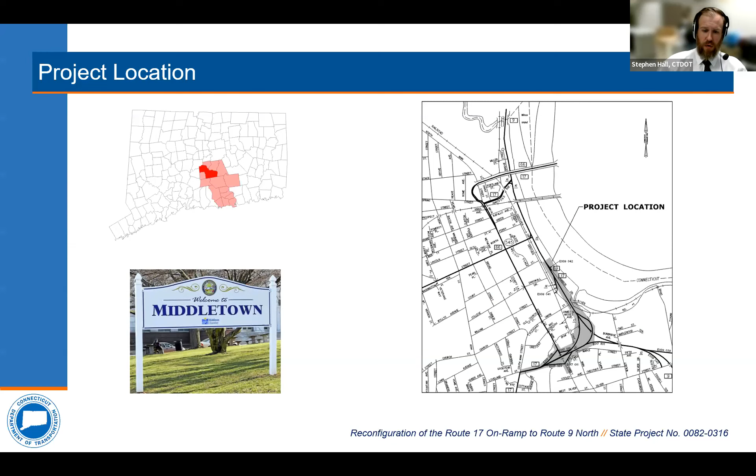This project is located in the city of Middletown in Middlesex County. On the right side here, with north facing up, we have the Connecticut River on the east side, Route 9 North, and the Arrigoni Bridge over the Connecticut River.

Now we have a few projects in the area, and you'll notice I've rotated the orientation, so now north is to the right and the Connecticut River is on the bottom. Since about 2014, we've been developing projects in this area, so I wanted to pause and make sure we all understand the different projects going on. We have Route 9 North from left to right on this page, and Route 17 northbound that overlaps Route 9 and goes up and over the Arrigoni Bridge.

One of the first projects we did back in 2019 was 82319. This project constructed sidewalk bump outs on Main Street with the goal to improve pedestrian safety, shorten crossing distances, and give that extra green time saved back to the cars on Main Street to encourage them to use Main Street instead of the side streets to cut through. This project was completed in about 2019.

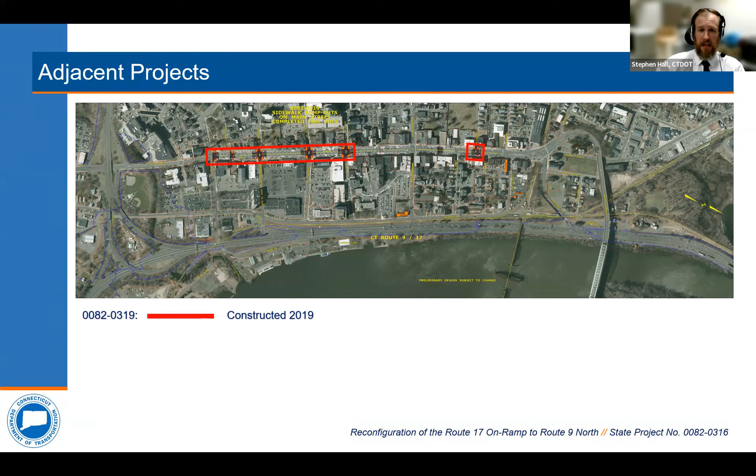The next project we did was 82320, completed in 2020. The purpose of this project was safety and congestion reduction, again trying to make operations on Main Street better to encourage vehicles to use Main Street and not cut through Spring Street, past McDonough School, Grand Rapallo, and things of that nature.

We fixed a dangerous signal configuration at Rapallo and Grand, where both legs had a green light, so we've been able to increase safety there.

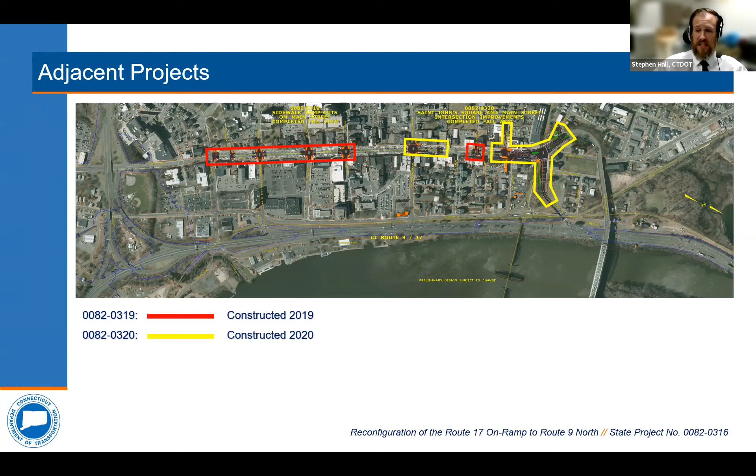We've also fixed a lot of the parking in the north end. There were very small parking stalls before, and we had a lot of sideswipe crashes with cars parking there. We were able to improve the size of those parking stalls and bring that back up to standard.

The next project, not yet constructed but designed, is 82-322. This project came about as a result of the 2018 public informational meeting regarding the larger signal removal project. The purpose of this project is to close off the Miller Street access to Route 9. Right now, that's the only access into or out of that neighborhood because of an at-grade railroad crossing that's closed. So 82-322 will open up that railroad crossing and close off the Miller Street access to Route 9, allowing that neighborhood normal, safe access through downtown as opposed to entering onto Route 9.

So again, this project is designed. The design is completed. However, there's a rather long railroad procurement process, so construction will begin in spring of 2024 for this project.

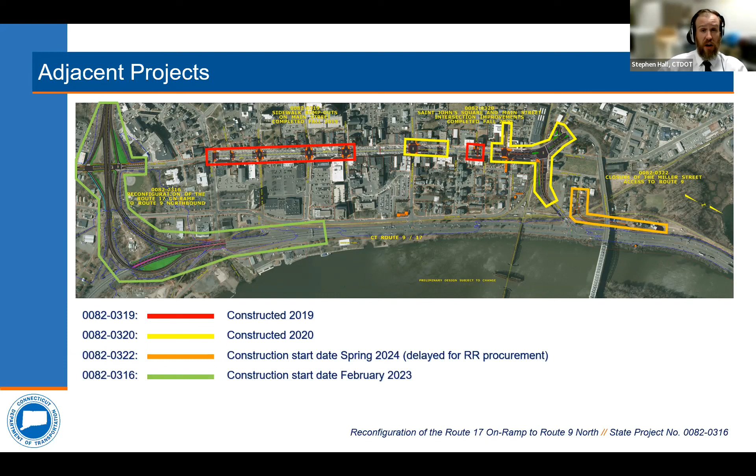The next project is the subject of today's meeting. That's 82-316, a safety project to reconfigure the Route 17 on-ramp to Route 9 northbound. We're going to get into significant detail on this project in the coming slides.

Lastly, we have project 82-318, which is a signal removal project. This is the large project that we've shown to the public a number of times. It proposes to remove the traffic signals on Route 9. This project is still in design. So in the past couple of years, we have been doing a traffic analysis and we're preparing to go back to the public in the winter of 2022, early 2023.

Just to reiterate, the reason I'm showing these all separately is that these all have independent utility. So when we evaluate these projects, we ensure that, and the federal highway ensures that, we are actually fixing a problem, and this project stands alone on its own. This project doesn't need other projects to be a good project, so to speak. There's a purpose and need for each of these that we have accomplished.

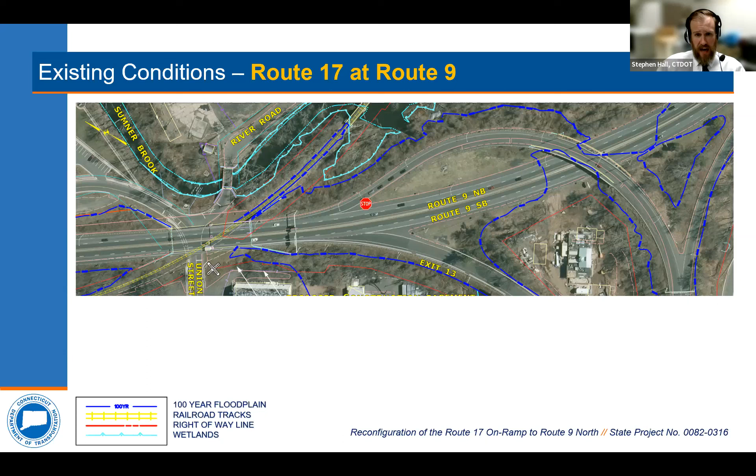So again, Route 17 up and over Route 9 to the stop controlled interchange. What we have at this location is obviously a stop sign. Vehicles have to look over their left shoulder at a very acute angle, and they need to try and identify a gap in traffic when cars are traveling 55 miles per hour. So a vehicle in this position needs to find that gap far over their shoulder and quickly accelerate to avoid getting into a collision.

As we move further north, the width of Route 9 is constrained by Bridge 638, which carries Route 9 over Union Street and the Providence and Worcester Railroad. As you take a look below Route 9, we see this is Union Street here, with the railroad crossing. Currently, we only have one pedestrian crossing, and that's on the north side of Union Street. There is a rutted out path, however, there's no safe pedestrian access across the tracks here. And this really is the gateway to the riverfront of Middletown.

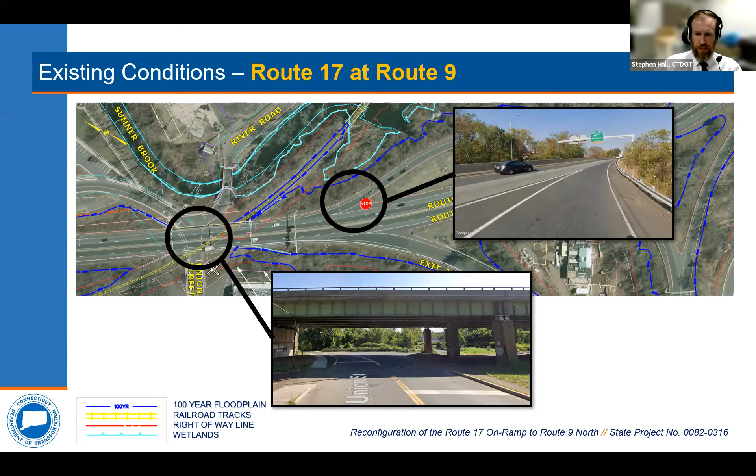Moving a little bit further north, we're going to look at Harbor Drive. Harbor Drive is a low-speed local access road to the riverfront that also serves Route 9.

If we take a look at Harbor Drive a little further back, you see the old canoe club. If you were a local in the area, you wouldn't think this was an on-ramp to a freeway. However, as we move further up Route 9, you see the interchange with Harbor Drive and Route 9. There is no stop control at this location, and there's really not much of an acceleration lane. So a lot of vehicles take this option onto Route 9 to avoid the previous stop-controlled interchange between Route 17 and Route 9. However, it's really not a safer option.

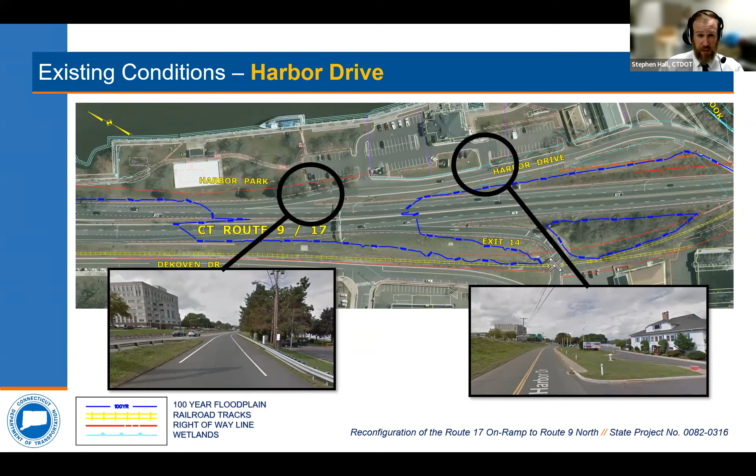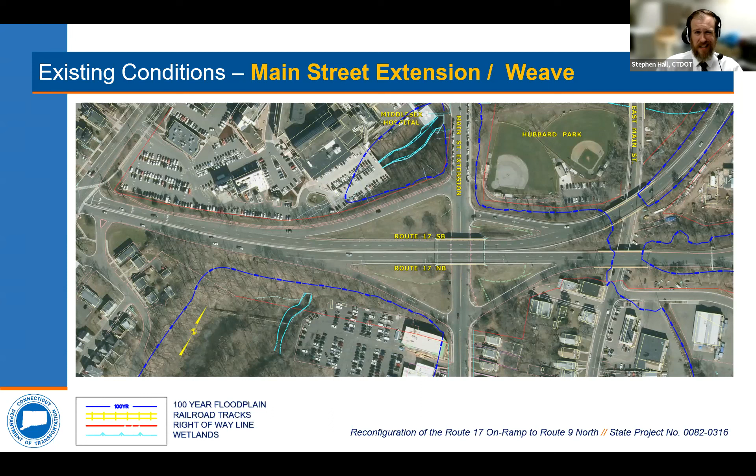Taking a look at this location, merging up from Main Street Extension onto Route 17, we have a weave condition. What that basically means is we have 2 lanes of traffic with a third entering here that splits off into Route 9 North and Route 9 South. We have driver uncertainty where one driver is trying to cross left while one's trying to cross right. It's not an ideal scenario.

Also on Main Street Extension, we have a very wide pavement structure. We've got on-street parking on one side and pedestrian access only on one side. You see there are actually pedestrians walking here, possibly to the hospital where they might work, with no pedestrian facilities.

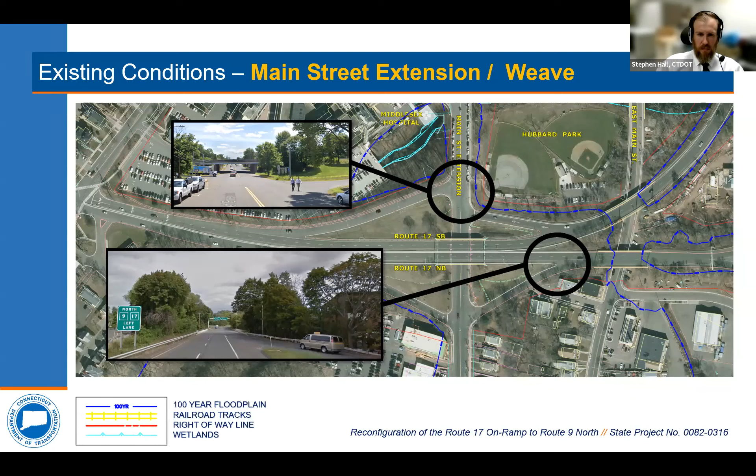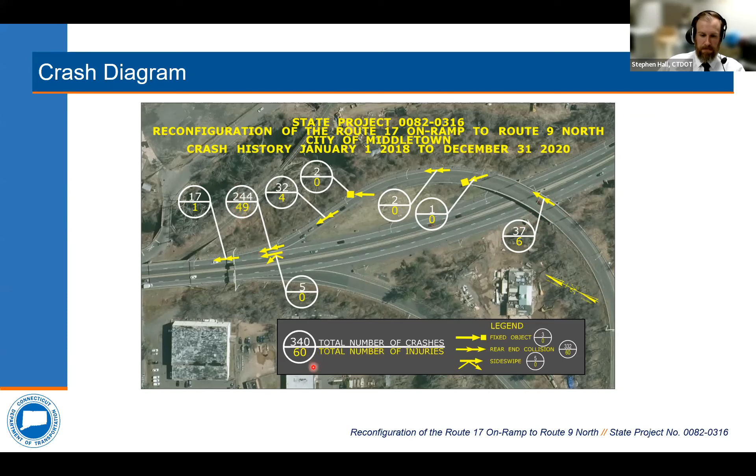So the purpose and need of this project is safety. The purpose of this project is to reduce rear end crashes at the Route 9 and Route 17 interchange. The project is needed because the existing stop controlled on-ramp from Route 17 onto Route 9 has a crash rate significantly higher than similar adjacent segments of freeway.

Essentially, we identified this location, how many crashes we would expect, and how many crashes we experience. So when there's a large discrepancy, that raises a red flag that allows us to investigate further and find solutions.

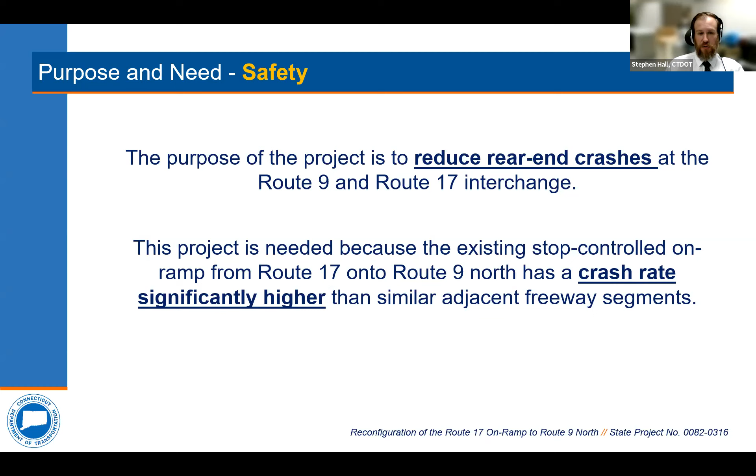So now to some project history. This project's been around for a little bit, as I mentioned before. September of 2014 was the first time this project was shown to the public. We had a public informational meeting, workshop style, with about 40 attendees. Generally well received, really no negative comments.

Fast forward a couple more years, 2016. In that time, we further developed the project, but we also brought out 82318, which is that signal removal project. So in 2016, we showed 2 separate projects, 82316 and 82318. Most of the comments revolved around the larger signal removal project. However, again, we really had no negative feedback on 82316, the Route 17 to Route 9 interchange.

From 2017 to 2019, we spent that time developing adjacent projects downtown that I alluded to earlier. We built 82319, which is the bump outs on Main Street. We constructed 82320, the St. John's Square improvements. I mentioned 82322, which is the Miller Street access that's going to be going out to construction shortly, and then 82316, which we've been developing over this time.

In January of 2021, we began monthly progress meetings with the city. We felt this was the best way to ensure that the city's plans for the downtown area really align with what we were designing early in the process to avoid needing to go back and do much redesign. So those were monthly meetings where we discussed the city's goals, our goals, and made sure we were aligned.

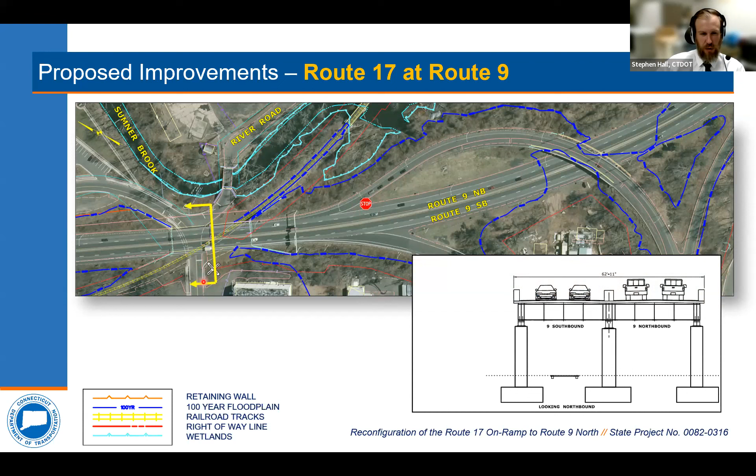Looking northbound in the existing condition, we have this yellow section break corresponding to this cross section. Route 9 northbound on the right side, southbound coming into the page on the left side. This is our existing configuration of Bridge 638, 2 lanes northbound, 2 lanes southbound. This constraint is what prevents us from adding that additional lane to provide appropriate acceleration for these vehicles.

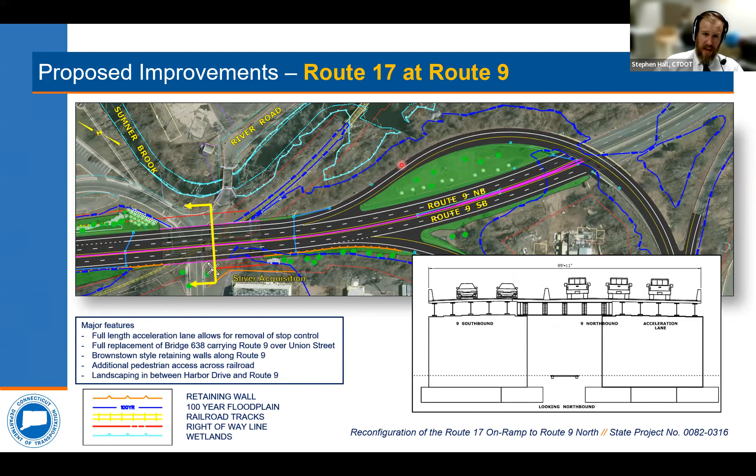So what we plan on doing is completely reconstructing Bridge 638, since that bridge is too narrow for us to fit that extra lane. We're going to replace the bridge in total. I want you to focus on the east edge of road, we're keeping that where it is. All the widening will occur on the west edge of road. So no work east of Route 9, and we're not doing any more work on River Road. There's no need to acquire any property in that area. This allows us to construct a full length acceleration lane on Route 9.

You'll see in the cross section here, same location, looking northbound through the bridge. We'll now have 3 lanes northbound, with the far right being the acceleration lane, plus 2 northbound lanes, and of course 2 southbound lanes. Some of the major features: the full length acceleration lane eliminates the need for that stop control configuration, and there's going to be a full replacement of Bridge 638 carrying Route 9 over Union Street.

We have retaining walls on the west side of Route 9, and as part of our coordination with the city and with Cooper Robertson, we're going to go with a brownstone style aesthetic treatment to try and match St. John's Church. Obviously, brownstone is a very big, important part of the area.

We're going to be adding additional pedestrian access across Union Street as well. If you recall, the only pedestrian access right now is on the north side, a rutted out path with no safe means to cross. So we're going to provide 2 ADA compliant safe pedestrian passages across the railroad crossing. Again, this is the gateway to downtown, and there are lots of plans to develop the riverfront. Now is the time to put that additional pedestrian crossing in.

And lastly, in the area, we have some great landscaping planned. Our landscape design unit was chomping at the bit to do some designs in this area to really help integrate our design with the riverfront development. We're very excited to see that design go in.

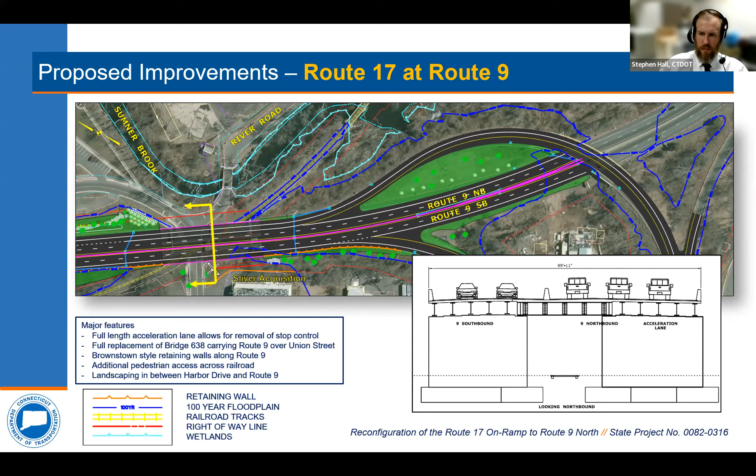I will mention there is a proposed sliver acquisition of the personal auto care property. We met with the property owner; it is a land-only acquisition. Basically, we need that space off our retaining wall to make sure we can properly maintain it. We've confirmed with him that this won't affect his operations on a day-to-day basis.

Moving a little bit further north, we're looking at the Harbor Drive area, oriented the same way, about 10 o'clock. We have Route 9 north running right to left, Route 9 south left to right, and Harbor Drive at the top of the screen. Harbor Drive really wants to be a low-speed roadway that services Harbor Park and the riverfront, not an on-ramp to a freeway.

So when we construct our full-length acceleration lane from Route 17 to Route 9, we have to lengthen it enough to ensure that vehicles entering Route 9 are at about the same running speed as the vehicles on Route 9. That low speed differential helps dramatically improve safety and reduce the severity of crashes. But because of that lengthening, the proximity becomes too close to Harbor Drive, creating a very unsafe condition for drivers. Additionally, given the riverfront development at Harbor Park, we felt it was contextually sensitive to close off the access to Harbor Drive.

Again, you see some more of that landscaping here, really trying to tie in our facilities with the riverfront area.

When we close off Harbor Drive, as I alluded to before, we're going to be redistributing a decent number of vehicles. Of all the vehicles that want to get to Route 9 North, half are going on Harbor Drive and half are taking Route 17. There's a tremendous amount of vehicles avoiding the stop-controlled on-ramp we're trying to fix, opting for Harbor Drive, which really is not a safer configuration.

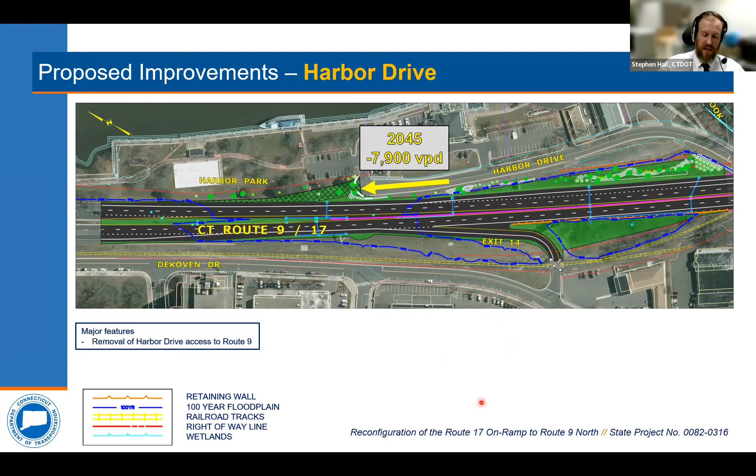Since we are redistributing all those vehicles, we need to accommodate them to get back onto Route 17 and Route 9. That's the impetus for the work at Main Street Extension. So those 7,900 vehicles will now be using this location to access Route 17, Route 9.

So again, a quick orientation here. We have that offset diamond configuration. It does not do well for traffic operations, and that's because of Hubbard Park's proximity to the freeway.

Our proposed scope of work is to first realign the Route 17 southbound on-ramp from Main Street Extension. We can't move the southbound off-ramp due to Hubbard Park. By realigning the southbound on-ramp, we can now signalize this intersection, modify the lane configuration, and more than adequately handle the 7,900 vehicles we're removing from Harbor Drive to pull them through Main Street Extension.

Additionally, we have this weave scenario here that I was discussing. We analyzed this with a few different traffic analysis softwares, and determined that the volumes were low enough that we can actually just hold one lane coming across Route 17 here and simplify the weave to 2 lanes. So as opposed to 3 lanes, very poorly striped, we're going to have 2 lanes, simplify the operations, and hopefully improve safety throughout the weave.

We're also adding additional pedestrian access on Main Street Extension. Right now, the only access is on the east side of the road. We're adding a whole additional sidewalk on the west side. Given the traffic generators with the hospital, and the pedestrians we see out there, we felt it was appropriate to add that pedestrian connectivity throughout the corridor here.

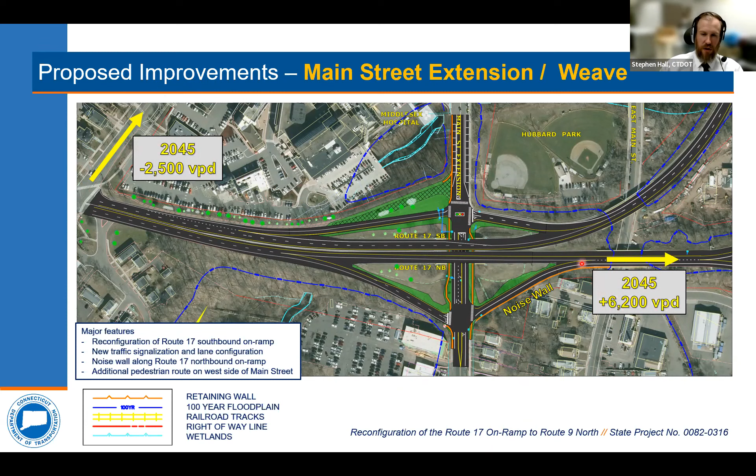As I alluded to before, of the redistributed 7,900 vehicles, 6,200 of those are going to be coming through here, and we're actually going to drop another 2,500 more in that area. So a tremendous reduction. We're going to get these vehicles where we would rather have them go, which is Route 17 to Route 9, not Union Street to Harbor Drive to get onto Route 9.

So let's summarize. What are the benefits of this project? First and foremost, improve safety. The removal of stop control and the extension of the acceleration lane allows us to dramatically reduce the number of rear-end crashes that we see. We see a clear pattern of rear-end crashes in the area. We can attribute that to the stop sign, and we have a solution to remove that stop sign and remove that unsafe condition. The lower speed differential will be a tremendous help not necessarily in the number of crashes, but the severity of crashes as well.

Talking about reducing the injuries that we see out there, a smaller speed differential will certainly help. We're going to remove about 7,000 vehicles per day on Harbor Drive.

This directly aligns with the city's Return to the Riverbend initiative. Eli Cannon's and Nora have been setting up shop down there, trying to build out a whole area down the riverfront. That's not a spot for a freeway on-ramp, that's a spot for a low-speed urban road. The city seems to agree with that, and that's something we got out of the press conference back in February.

We're also going to improve pedestrian connectivity along Union Street and Main Street. We found two locations with ability to add additional pedestrian crossings: Union Street across the railroad, and the Main Street extension heading on the west side of the road.

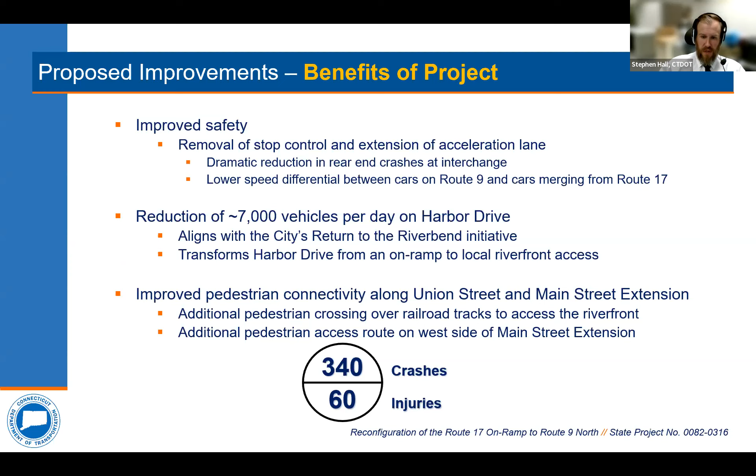At this point, I'm going to turn it over to Matt Giannakopoulos, who is part of our division of rights of way, to discuss the process for property acquisition. Thanks, Steve. I'm Matt Giannakopoulos, a project coordinator with the department's division of rights of way. It's our office's responsibility to acquire the property rights needed for transportation projects.

As Steve alluded to earlier in the presentation, the proposed design does require an acquisition of a small portion of property to allow for the reconstruction of the Union Street Bridge. I'm here tonight to give a brief overview of our right-of-way acquisition process.

All property rights will be acquired in accordance with Connecticut General Statutes sections 13A-73 and 13A-98E. And whenever federal money is used in any phase of a project, such as this one, the department must adhere to what is known as the Uniform Act.

At this point, the affected property owners have been sent a letter of intent to acquire from our office, and it depicts the exact rights to be acquired. We're in the process of obtaining an appraisal to determine the fair market value of those rights, and we'll use that value to establish an offer of just compensation.

That offer is then sent out to the owner in writing, and a right-of-way agent from our office is available to meet with the owner to explain the project in more detail, the impacts to the property, and how the state came up with its offer.

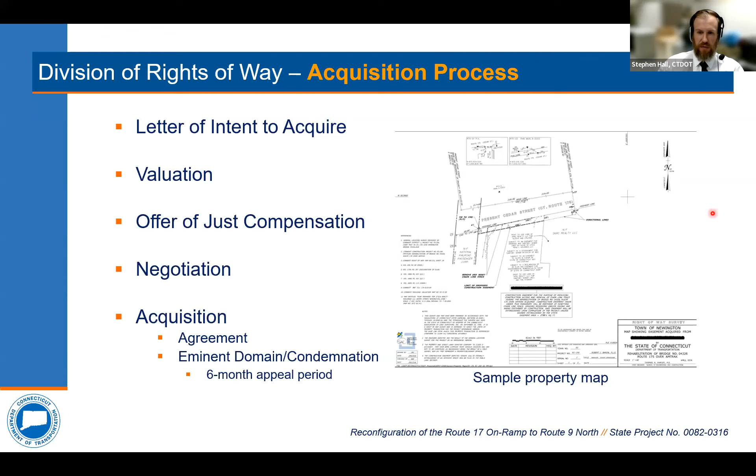Okay, so now I'd like to get into the construction staging. We've shown the proposed improvements. Now we want to show how we're going to actually go about building this. There's going to be 10 stages, so try and bear with me here, but I'll try and keep this simplified.

The first thing we're going to do is the Main Street extension, and this is going to begin spring, summer 2023 and last about 3 months. The major work in this stage is going to be to relocate the Route 17 southbound on-ramp from Main Street extension. This may require a detour via Pleasant and South Main, but that would be a very short duration.

One of the reasons why we're doing this work first is because if you think about the redistributions from the Route 17 on-ramp, we're going to send a lot of vehicles to Main Street Extension once that on-ramp's operational. So we need to make sure this location is operational prior to redistributing all those vehicles from Route 17. So we have it staged this way.

We have stipulations in the contract that force the contractor to build it in this order. However, I will mention that this is a suggested construction contract sequence. We will receive submissions from the contractor that the department will have to review and approve to ensure we're not causing undue stress to parades downtown, riverfront development, things of that nature.

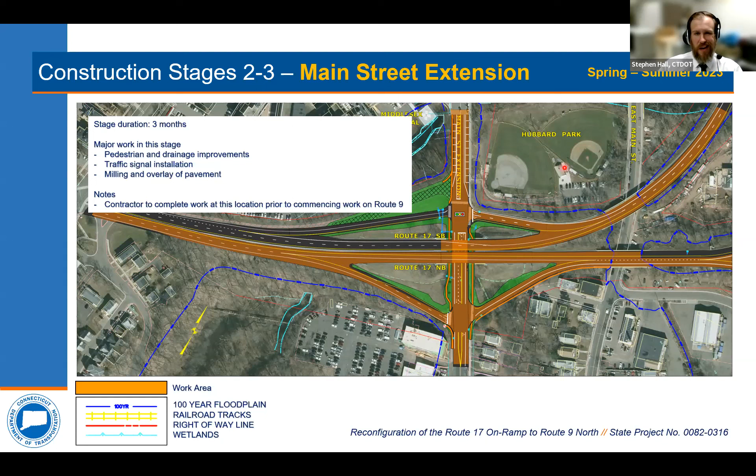The next thing we're going to do is the pedestrian improvements and the drainage improvements off the edge of the road. This is still spring, summer 2023, about 3 more months of work, kind of offline, doing the sidewalks, the drainage. We have to install the traffic signal.

And then from that point, we're going to mill and overlay the pavement. So the orange you see here will be where the pavement is removed. There may be some bridge work that will rear its ugly head once we pull that pavement off that may cause some problems, but we're not expecting something along those lines. And then we're going to put back new pavement.

So when we move on to Route 17 and Route 9, the location you're looking at here is going to have fresh pavement markings. It's not going to feel like you're driving through a construction site.

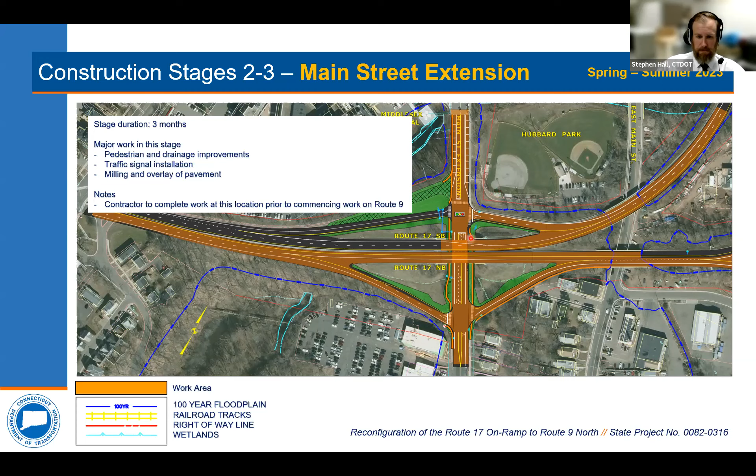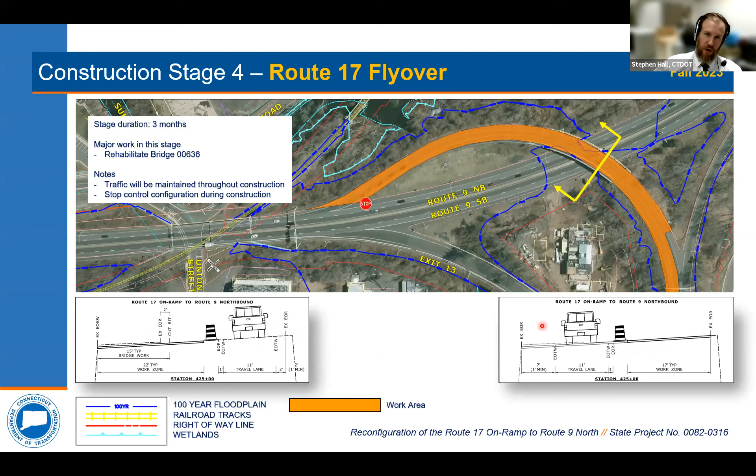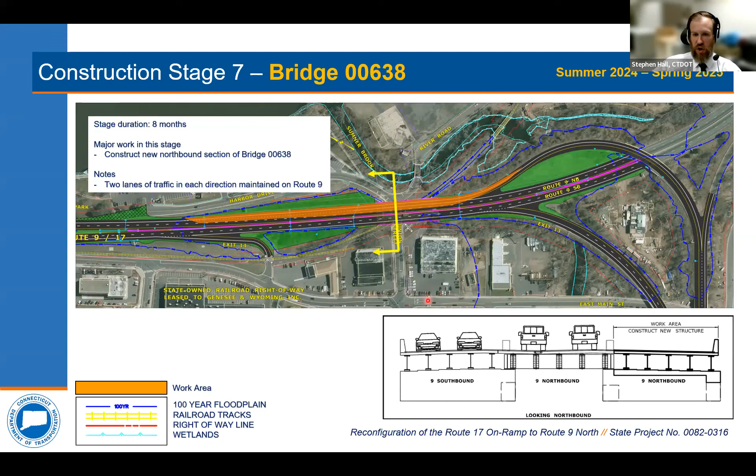Look at stage 7, the last of our major bridge stages. At this point we've constructed the westernmost and central portion of the bridge. Now we're going to look at the easternmost portion of the structure. Here we're running Route 9 southbound traffic on that relatively new structure. We've got the center structure up and running, and now all the way to the east we're going to construct the east side. Major work here is to construct the northbound section of Bridge 638, maintaining 2 lanes of traffic in each direction. We're looking at summer of 24 to spring of 2025. Each of these bridge stages is rather robust, and they take a good amount of time.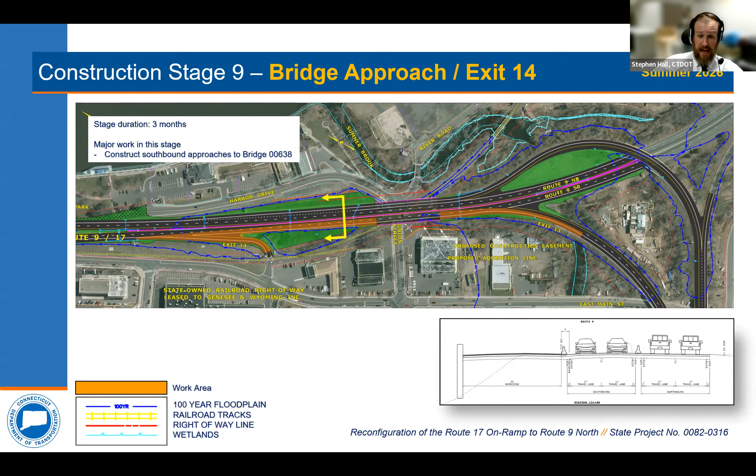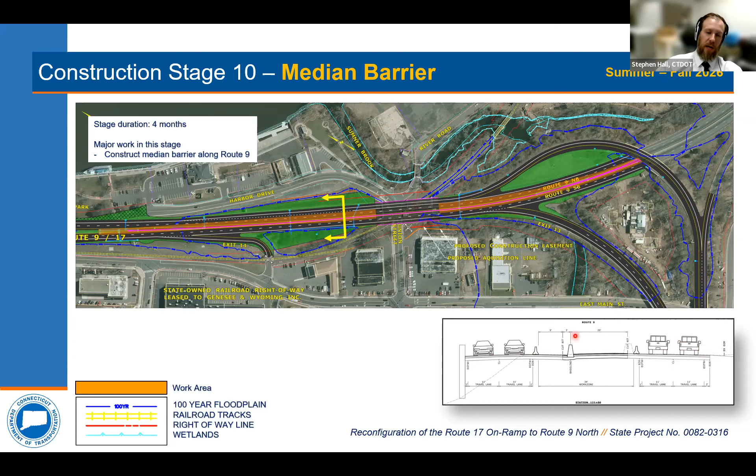Moving on to stage 9, very similar - this is going to be the approach work and some wrap-up work on the southbound lane, getting everything back up to grade. There is a rather large elevation change at a couple of spots, so we have to step up the elevations a little bit. Then our last stage, stage 10 - the last thing we have to do is the median barrier. We'll have traffic running all the way to the east and all the way to the west, and we're going to have a work area down the center to construct that single slope median barrier, improving safety there tremendously.

So to recap, this is our final condition, focusing on the ramp configuration. This is our permanent condition. We have our Route 17 flyover. We have not widened anything over to the east, no impacts to the east aside from that landscaping. We've widened the structure over to the west, so we've now provided an acceleration lane, a free-flow acceleration lane without having to stop for vehicles coming over Route 17, all the way up to Route 9 North to gradually merge into traffic. We're maintaining those 2 lanes northbound and 2 lanes southbound.

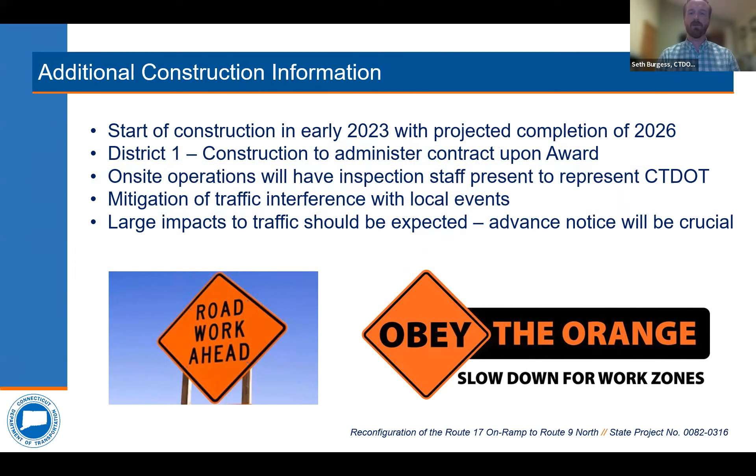Good evening, and thank you, Steve. My name is Seth Burgess, supervising engineer from District 1 Construction, and I am joined by Mr. David Gentile, who will be the project engineer overseeing this project. As previously mentioned, we're anticipating the start of construction in early 2023, with anticipated project completion at the end of the 2026 season. District 1 Construction will take over as the lead point of contact in regard to administration of this project following the award of the contract. All on-site contractor operations will have inspection staff present to verify compliance with appropriate contract specifications.

We anticipate large impacts to the traveling public, which will require constant oversight, communication, and coordination regarding the maintenance and protection of traffic staging that's going to be implemented, as Steve has detailed in the past couple slides. Though these impacts may be large in relation to normal commutes of the public through this area, construction will be temporary over a few-year duration and provide a much safer and efficient flow of traffic for years to come.

Connecticut DOT representatives will work to coordinate with the City of Middletown to mitigate any traffic interference with large city events. We also request continuous assistance and understanding from all stakeholders regarding impacts to existing roadways during construction, in hopes of increasing work zone safety for all, including the public, the contractor, and Connecticut DOT representatives. Concerns will be addressed in a timely manner to keep all in the area safe and keep the construction project moving forward. Thank you, Steve, for the opportunity, and we look forward to enhancing the infrastructure through this area. So with that, I'll kick it back to you, Steve.

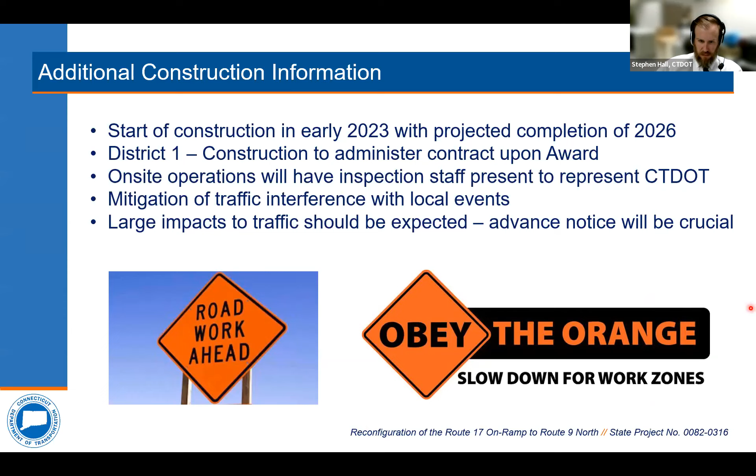Okay, so project schedule and cost. We're going to advertise this project October 27th, with bids opening to contractors on November 30th. We expect to award the project January 27th, with a construction start date of March 13th. As Seth mentioned, we expect to complete this project by the fall of 2026, and it's a construction cost of about $54 million.

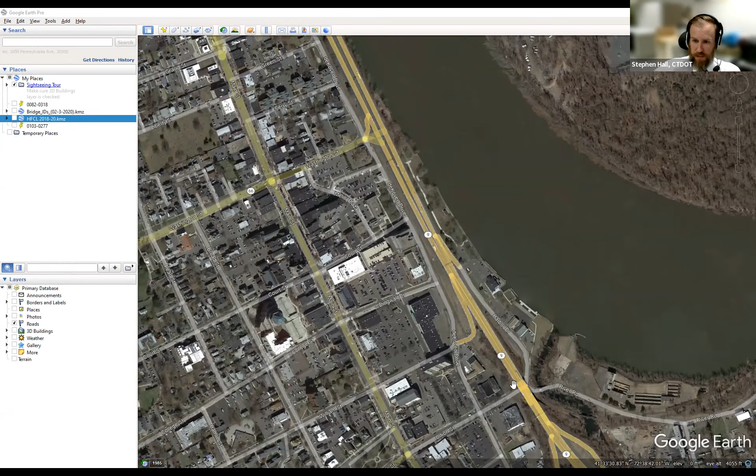So the Harbor Drive ramp will close when we open the new on-ramp, which is going to be one of the last stages—I think fall of 2025. Essentially, we're not going to open that new ramp until the infrastructure around it is set up to handle that additional flow of traffic. So as you mentioned, vehicles traveling on Harbor Drive to get to Route 9 would take Union Street, come to Main Street Extension, take Route 9, Route 17 to Route 9 North. So while it's a large change in traffic operations, that's one of the reasons why we did a rather extensive traffic analysis on this. We took a look at all the traffic volumes in both Synchro and VISSIM, two proprietary traffic analysis programs that both look at individual intersections as well as the network as a whole.

So we have essentially the entire downtown area modeled. What we do is calibrate that model to our existing conditions, and then extrapolate that out with our proposed conditions to ensure we're properly handling the redistributed traffic. There are certain standards we have to meet as far as calibration, federal guidelines to give a certain level of confidence that what we're proposing is actually going to happen. We've looked at the redistributions, and that's one of the reasons you see that new lane configuration on Main Street Extension, to handle the extra vehicles, looking not just at Main Street Extension, but how they got from Harbor Drive all the way to Main Street Extension. So we're not just taking two points, but the actual path between them.

Hopefully that answered your question. I'm just going to go back and check to make sure. I believe so. Certainly follow up if I did not.

The next question, Robert Hurwitz: Will all lights on Route 9 be eliminated? As part of this project, no traffic signals on Route 9 are going to be eliminated. The 82318 project, which is separate, proposes to remove two traffic signals on Route 9. However, this project will just focus on the Route 17, Route 9 interchange, so they will not be removing any of the traffic signals on Route 9. There will be a public informational meeting for that project, hopefully December or January, sometime around winter 2022-2023.

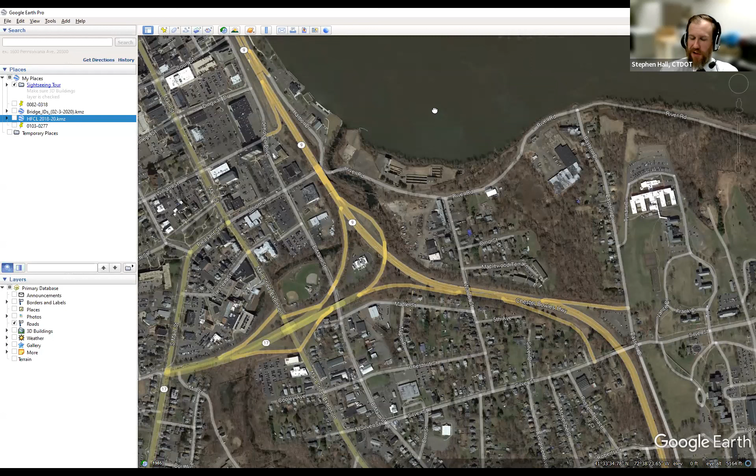Certainly, I appreciate the questions. I'll hang on for a while if there's any more, but certainly anything you've got.

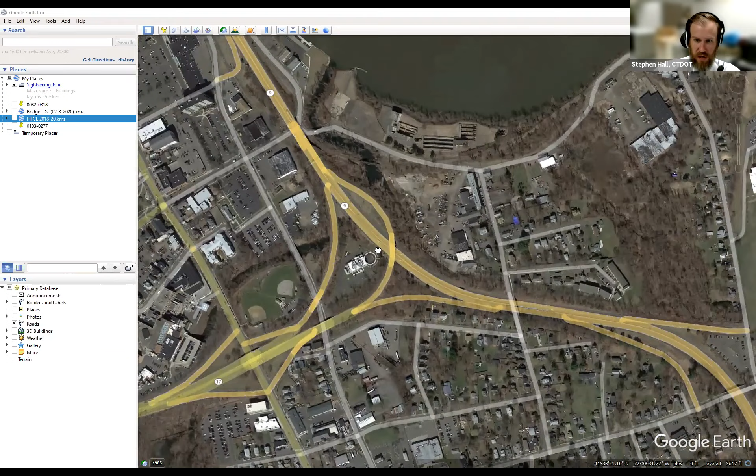I will add that there is another project going on in the area at about the same time. On Google Earth here, Bridge 636, a separate contract is going to do some repair work on that structure. We have a stipulation in our contract to prevent any kind of undue stress between the two contractors at the same time, we're not going to have them both working at the same time on the same structure. So all that to say, we're trying to deconflict a lot of different entities in the area to make sure we're not causing tremendous backups on Route 9 or Route 17 or the downtown area as we're doing this work.

Yeah, thank you Steve. Just to add to that, that will be Dave Gentile on my project as well. So we'll be working with our two separate contractors and our inspection teams to coordinate the work between the two projects to mitigate any negative traffic impacts between them.

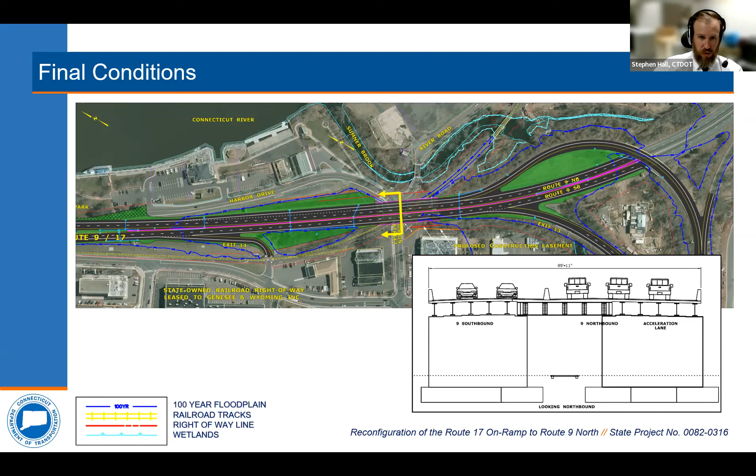So we're not proposing the flyover; that was a previous proposal, alternative 3, that we showed to the public in 2018. We're not going to be showing that proposal in the winter. There's going to be something a little different.